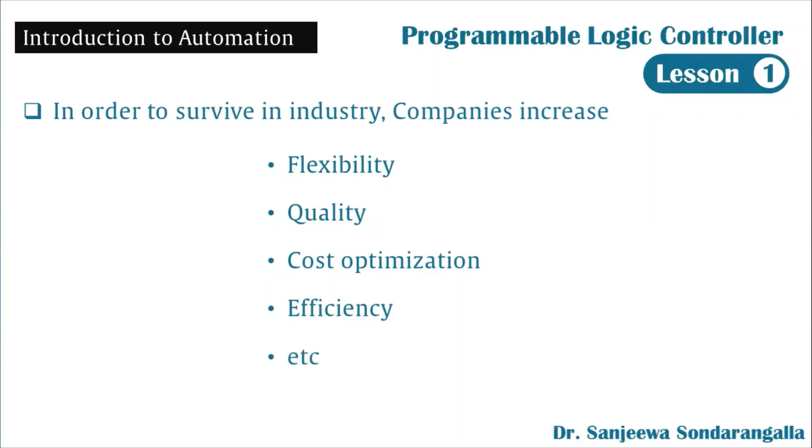Introduction to Automation. In order to survive in industry, companies comparatively increase flexibility, quality, cost optimization, efficiency, etc. As a result, automation technology has been introduced for most companies in the manufacturing industry and process industry. Actually, it is a combination of control system and information technology.

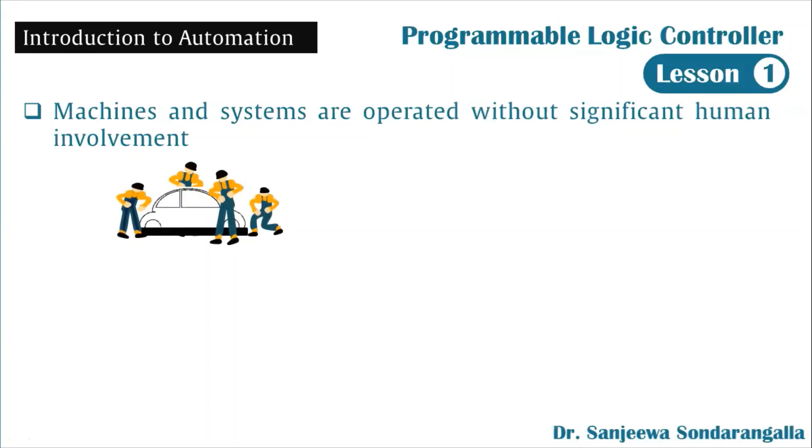In automation, machines and systems are operated without significant human involvement. Therefore, automation technology reduces human activities in the industries. As an example, before the automation, vehicles were manufactured by workers. Both skilled and unskilled workers were involved with the manufacturing process of vehicles. After introducing the automated production line, a vehicle has been built with minimum workers. Now, automation plays an increasingly important role in the industry.

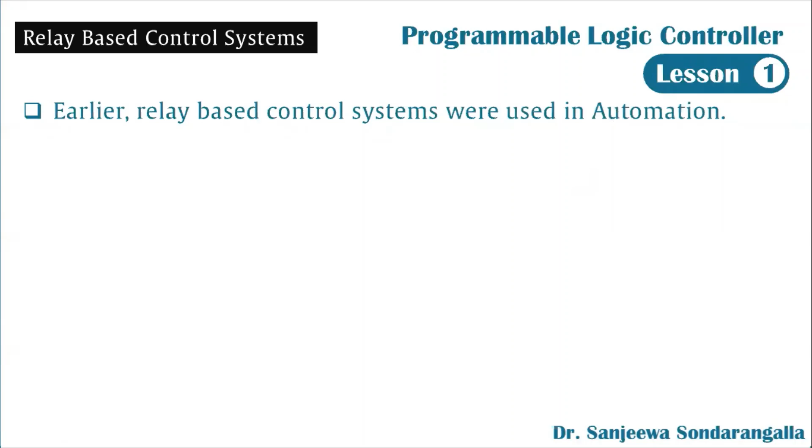Earlier, relay-based control systems were used in automation. Relay-based control system has to be hardwired to perform. If the system requires a modification, the wiring system has to be modified. It was a particular problem to the automation industry. In addition to that, relay-based control system required a large space to be used for electromagnetic relays.

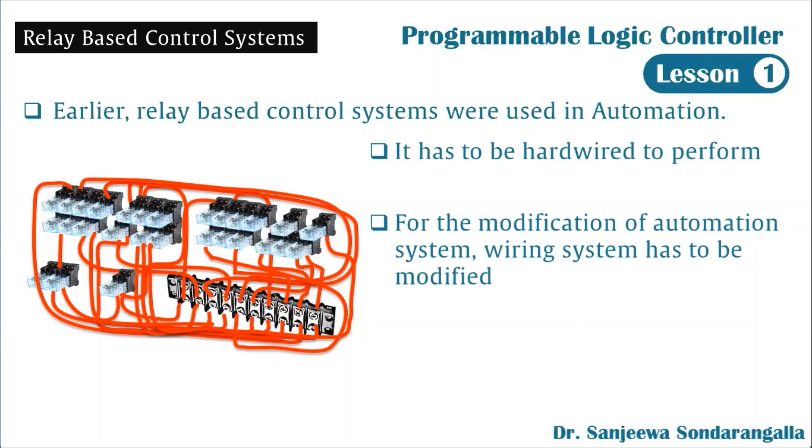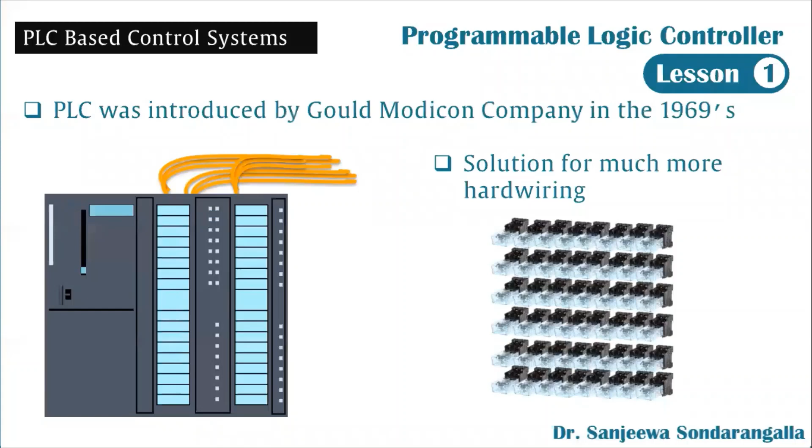The first programmable logic controller was developed to replace relays and relay-based control systems in the 1960s. It was a solution for much of the hard wiring required by relay-based control systems. A PLC can be programmed as a replacement for 1,000 relays in a relay-based control system. PLC is an industrial-grade computer. It has a programmable memory to store the instructions and to implement functions which are used to control the automation systems. PLC can perform logic, counting, timing, sequencing, arithmetic.

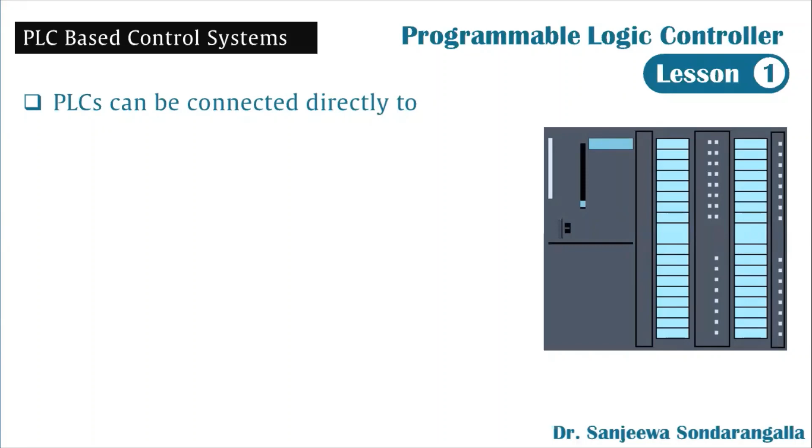The PLC is a small control device that can be connected directly to such devices as voltage and current sensors, thermocouples, resistors and resistance thermometers, switches, two-wire proximity switches, solenoid valves, contactors, low-power motors, lamps, and motor starters. The PLC is built to withstand the industrial environment. Troubleshooting and modification of the control logic can be completed within a short time period.

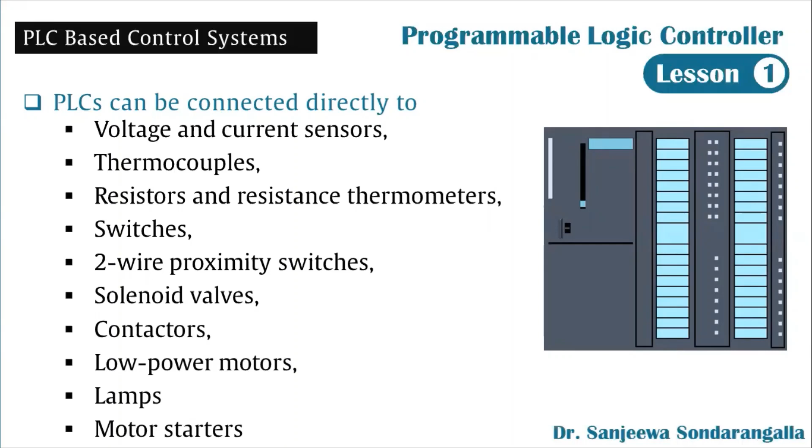Advantages of PLCs. Key advantages are discussed here. First advantage is flexibility. As I explained, modification of the system with PLC-based control systems is easier than relay-based control system. In relay-based control system, relationship between the inputs and outputs is obtained by the wiring. But in PLC-based control systems, input devices and output devices are separately connected with PLC. The relationship between the inputs and outputs is obtained by the user program.

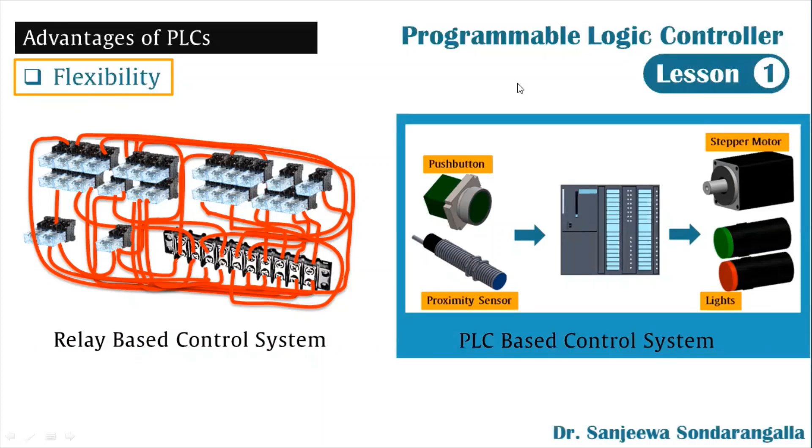Next advantage is quick response. PLC-based control system can be used for high-speed automation systems. As an example, counting process of the high-speed production line requires quick processing of the controller. Therefore, PLC can be used with high-speed production line.

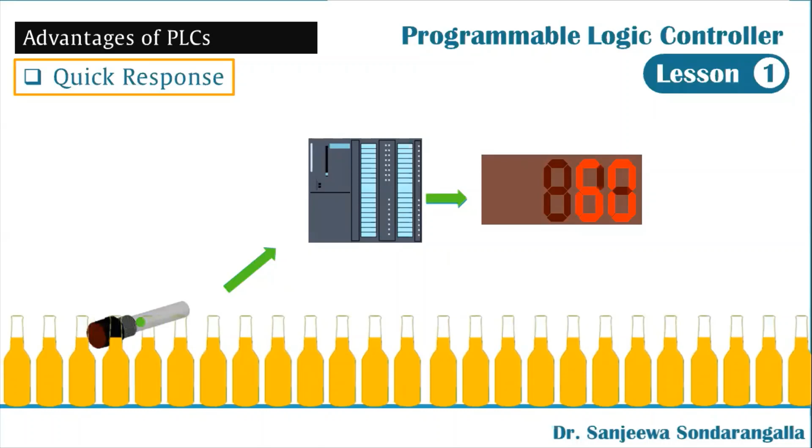Reliability. PLCs increase the reliability. PLC program can be written and simulated without hardware components. If any error or mistake is observed, program can be modified. Finally, accurate version can be downloaded to PLC. As an example, Step 7 software is used to write program for the Siemens S7-300 PLC. After writing program, it can be simulated using the Step 7. The accurate version can be downloaded to the S7-300 PLC.

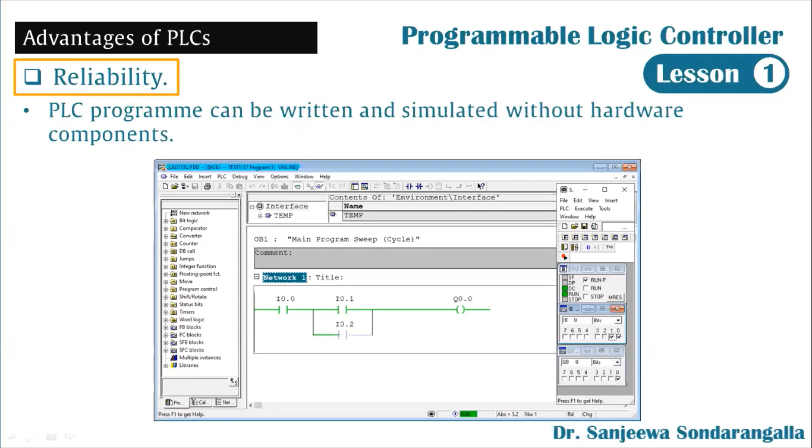Components of the PLC. PLC consists of following components: power supply, central processing unit, CPU, input module, and output module. Externally, programming devices can be connected to the PLC.

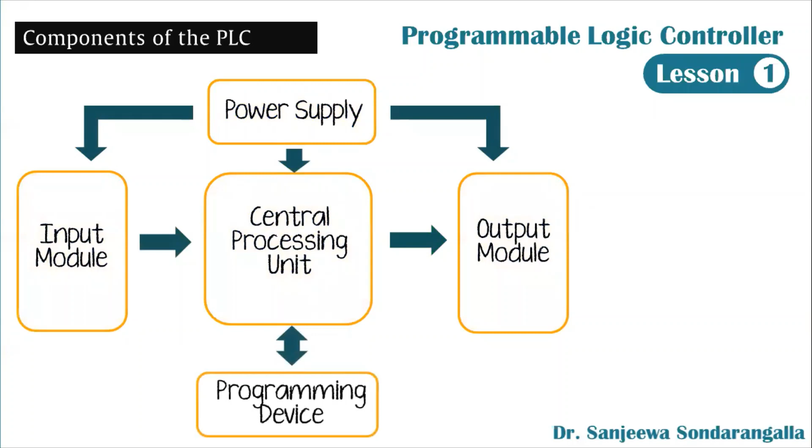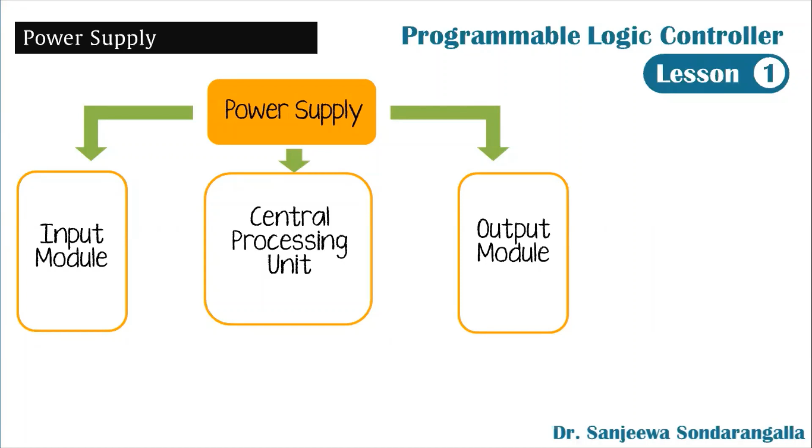Power supply module. This power supply module in PLC is used to supply the power to the CPU, input modules, and output modules. Normally PLCs have 24 volts DC power supply.

Central processing unit. The central processing unit, CPU, is the brain of the PLC. CPU receives signal from the different types of input devices. Then it will be processed by the downloaded program in the CPU and send command signal to the output devices.

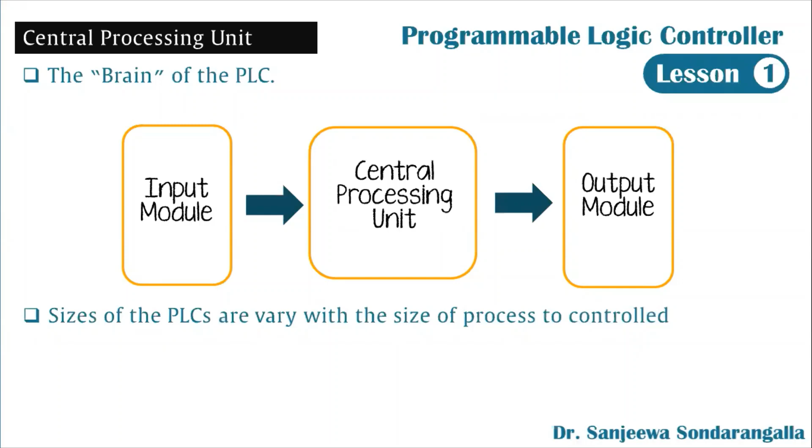Sizes of the PLCs vary with the size of process to be controlled. Small PLC which has limited memory is required for small scale automation. For the large scale automation, large PLC with more memory is required. Some PLCs can expand the memory.

Many PLCs come with a battery backup that is useful to keep the program in the memory during the power failure. Battery backup supports to keep the program from 1 month to 1 year. Siemens PLC provides battery backup with CPU 313 and above versions.

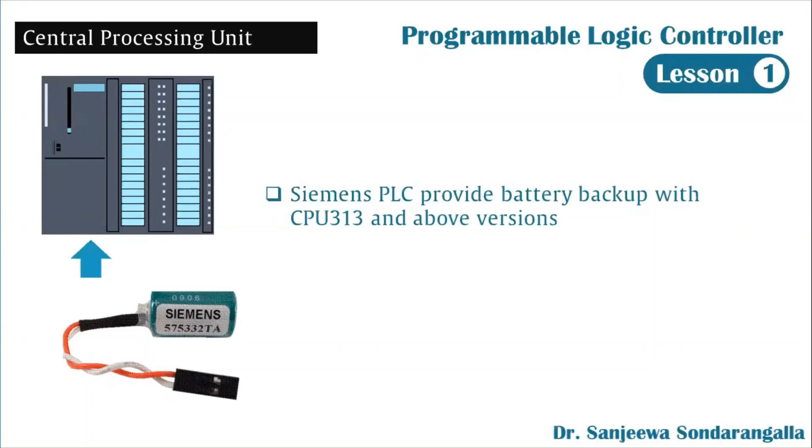Input and output modules. Input modules and output modules of PLC provide interface between field devices and CPU of the PLC. CPU receives information from the input devices via input module, and CPU sends information to output devices via output module. Input and output module may be analog or digital.

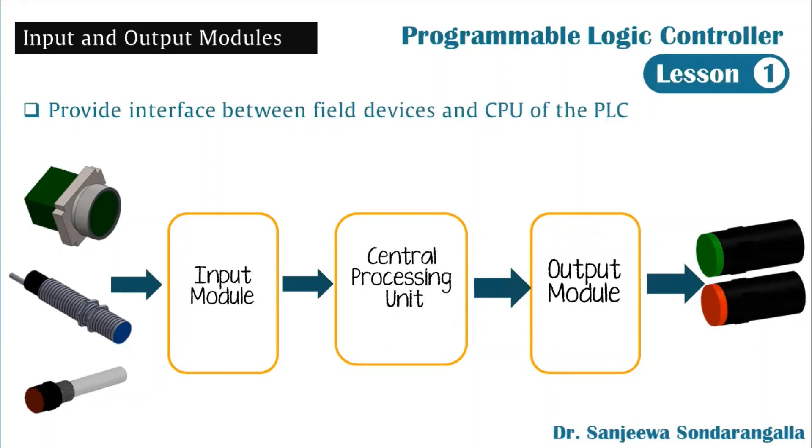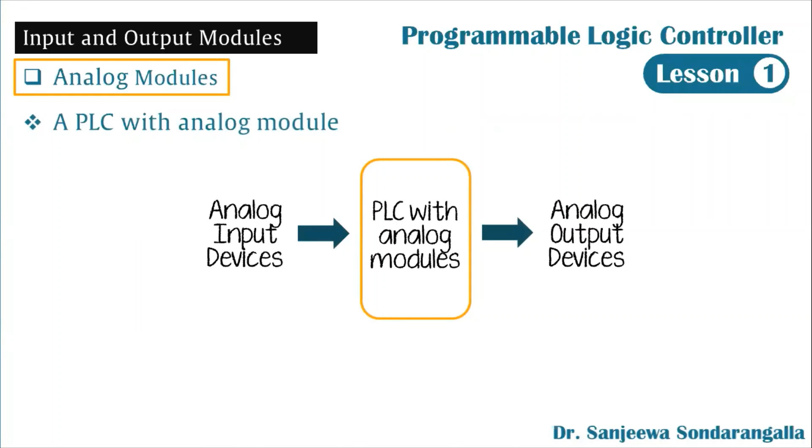Discrete type sensors such as limit switch, photoelectric switches can be connected with digital input module. Discrete type devices such as relays, light, and solenoid are connected to the digital output module. Some PLCs come only with digital modules. But in practical scenario, analog input and analog output devices are used with automation system. If it is required, a PLC with analog module or expansion analog modules can be purchased.

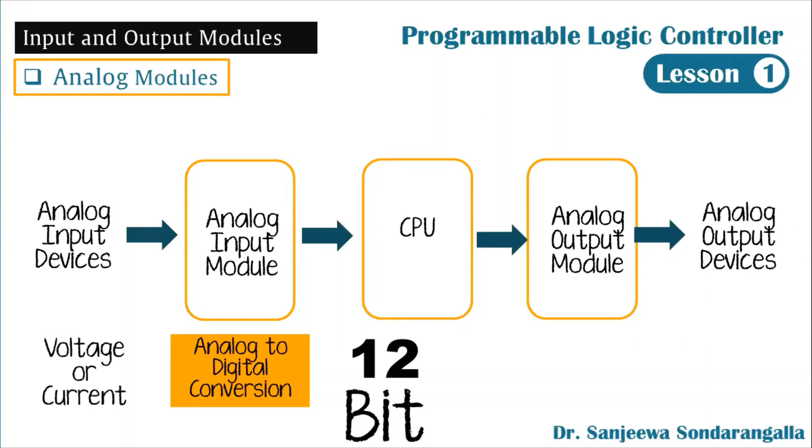The analog input module comes with one or more analog to digital converters. Therefore, analog input devices can be connected to the programmable logic controller directly. Measured voltage or current from analog devices is converted into 8-bit or 12-bit or 16-bit digital word. The analog output modules come with digital to analog converters, allowing the PLC to send analog signal to the analog devices.

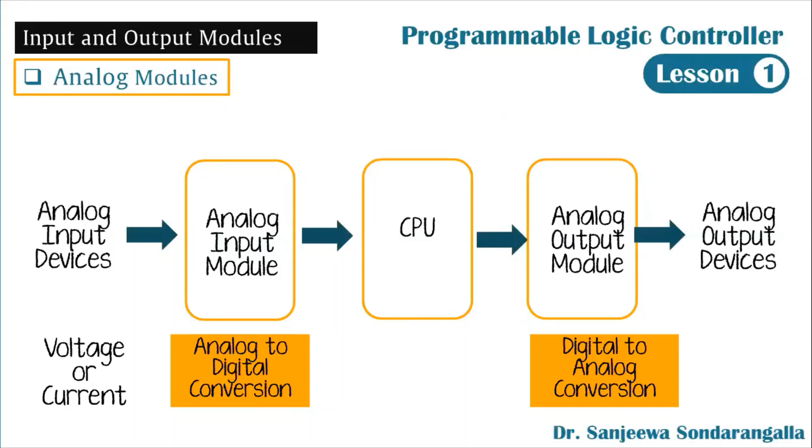Siemens introduced different types of expansion modules. Here consider a few of them. Analog modules from Siemens. SM331 analog input modules: for the connection of voltage and current sensors, thermocouples, resistors, and resistance thermometers. SM332 analog output module: for connecting analog actuators. SM334 analog input and output modules: for connection of analog sensors and actuators.

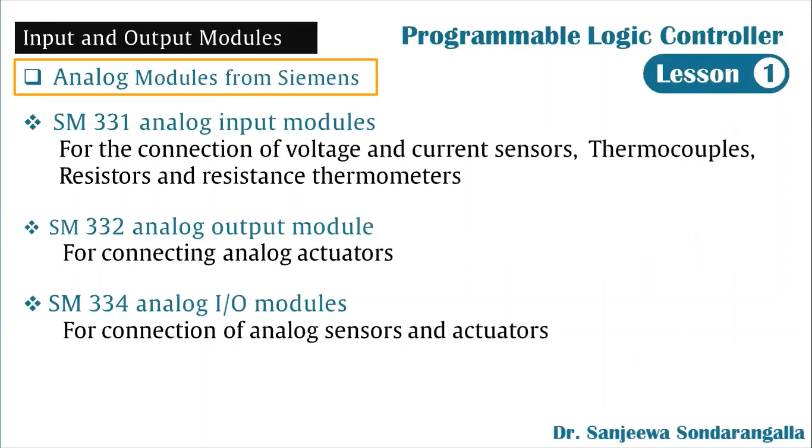Digital modules from Siemens. SM321 digital input modules: for connecting switches and two-wire proximity switches. SM322 digital output modules: for connection of solenoid valves, contactors, low-power motors, lamps, and motor starters. SM323 digital input-output modules: for connecting switches, two-wire proximity switches, solenoid valves, contactors, small motors, lamps, and motor starters.

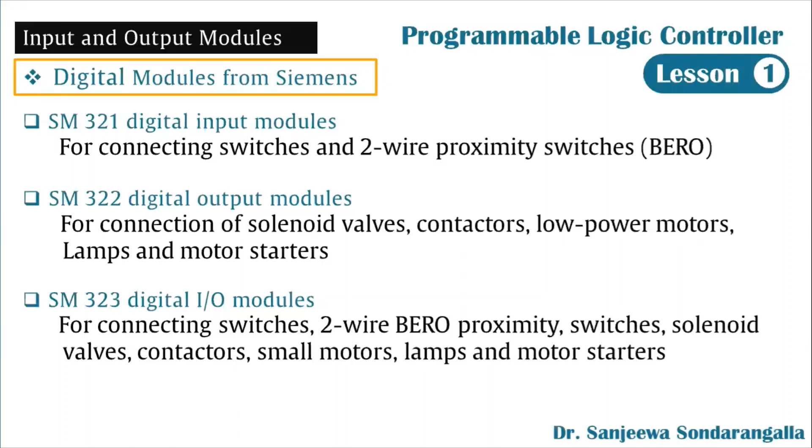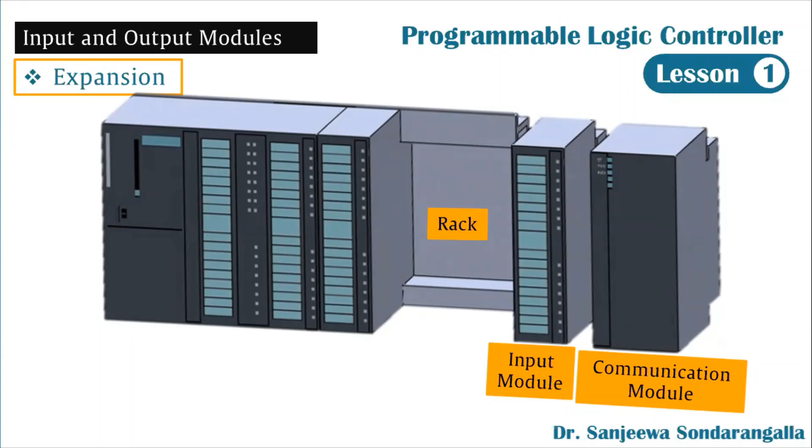PLC provides flexibility to connect several input and output modules. All modules can be mounted on rack. There are no specific slots in rack for the module. The rack has capability to accommodate any module with any slots.

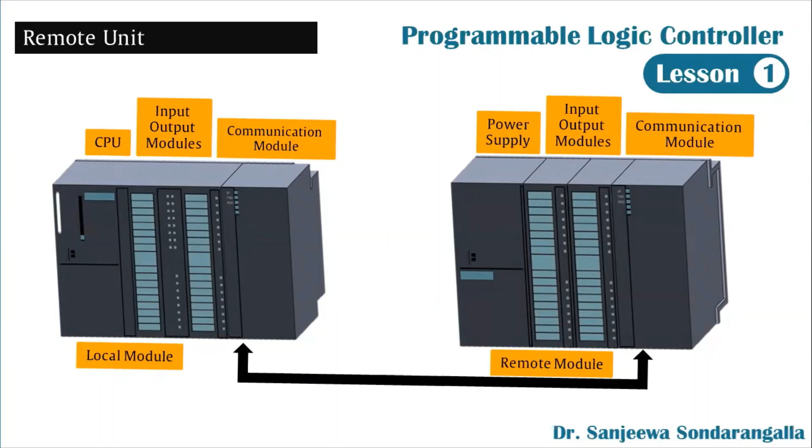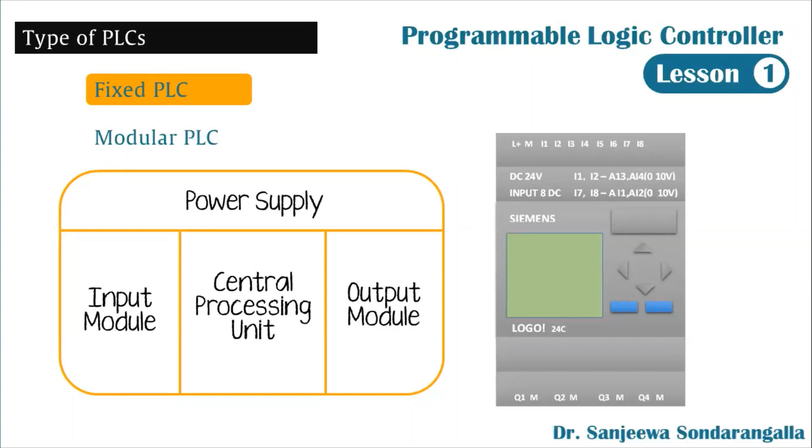Modular PLC comes with separate modules. All components can be mounted on rail. When you are designing the automation system, PLC can be purchased based on the number of inputs and outputs of the system. Later, if expansion is required for the system, input and output modules can be purchased.